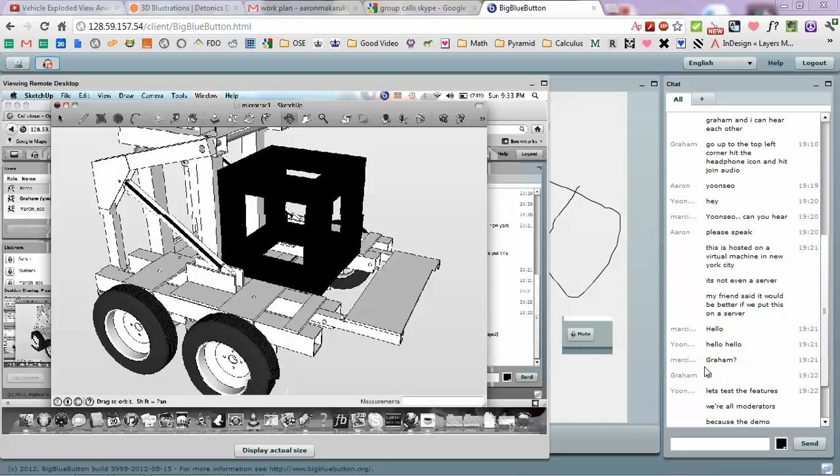As far as your screen sharing, just keep that. Hello? I'm still here, it looks like Marcin, something happened to him. I think you might be changing settings because you have to log out to do that.

Hey, open that file again, let me take a closer look. Okay. Yeah, please ask questions, because I think it looks pretty funny too, but it's like really wide in order to make room for the quick connect wheels and still keep it small.

Hey, because when you share there's latency, see how wide that is? Yeah, hold on. Try not to move it so much because it distorts it over the latency, just kind of keep a fixed view if you can.

Let me get it. Okay, I got dropped off. Did you guys get dropped off too, or no? No. Okay, I got dropped off, basically I just joined it again. I got dropped off and I went right back in.

Okay, that's looking good. What's the width of the base? What's the base width? It's about 4 feet. 4 feet? Yeah. How are you getting that to fit? As far as I know, the shortest width of the base would be like 7 feet. Well, wheel to wheel is like 7 feet if you use the existing configuration.

How'd you manage to do that? What'd you shrink up there? You cut off something, because the width should be... you're telling me 4 feet? Quick connect, you... yeah, the quick connect wheels. How'd you do that?

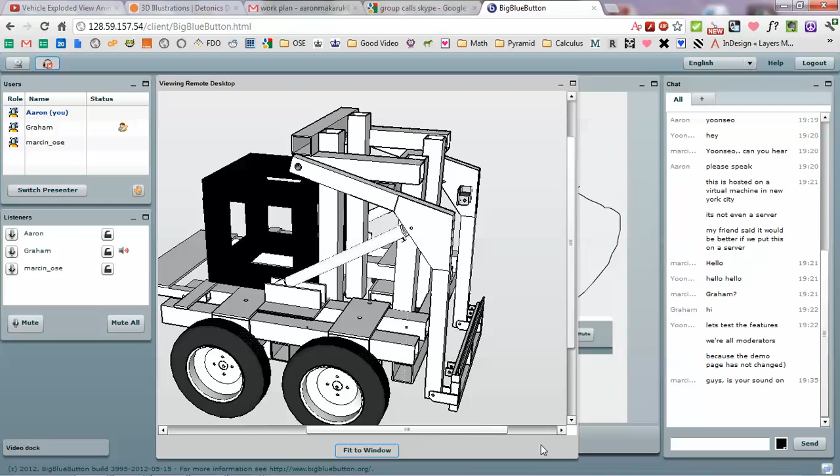Let me give you a bottom look. I don't know how these hydraulic motors are configured, I really have like no experience. Oh, okay. Oh, interesting, okay, but you're showing drive on one side only.

I meant to do it... yeah, because I don't know. Could you do like one... I didn't mean to do it like that, but like one on opposite of each other? Yeah, they gotta be like that. Yeah, it would have to be one on each opposing diagonal wheel, so like one on the back left and the top right. Yeah.

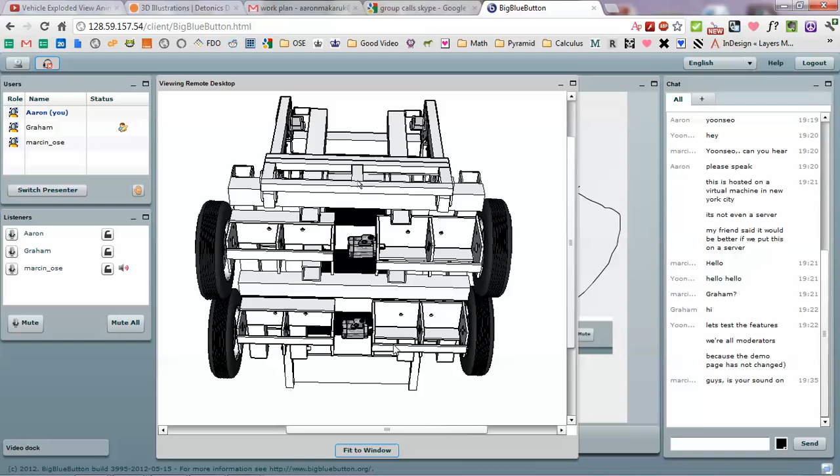Okay, that's all, that's pretty good man, I'm pretty impressed, you basically took the existing elements and reconfigured it. The issue is, yeah, you're using one motor instead of two opposed motors, which shrinks the wheelbase. That's awesome, and yeah man, that's cool.

And that person there is to size, right? Say what? He was asking if the person is to size. What? He was asking if the person is to size. Oh, I think it's like an average sized person, yeah, like 5 feet 5 or something.

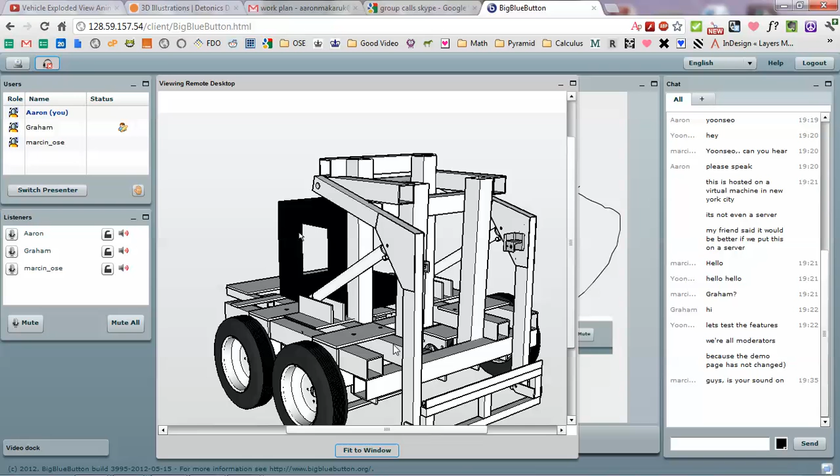Okay, so tell me about the wheels, what size wheels are you using? Like 20-some inches? I think they're 12 inches. Can you measure across? 1 foot 8 inches, so 20 inches. If that's 4 inches for the tubing, there's only 5 sections of tubing that fit in that wheel.

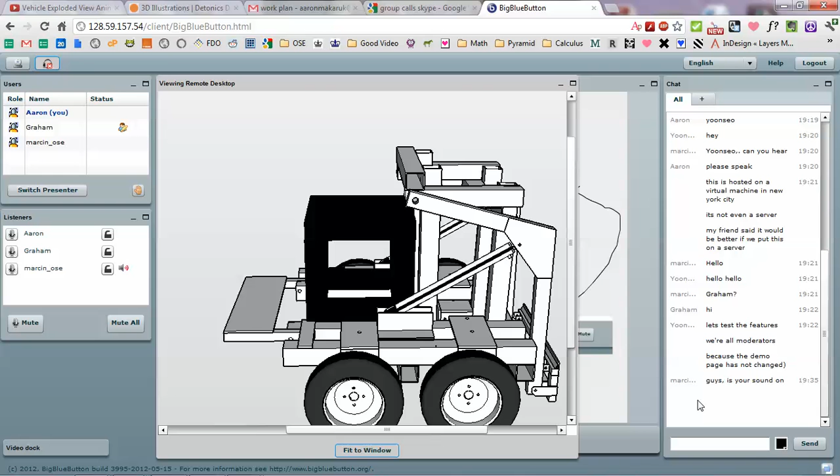It looks like it. Show me that directly from the side. Yeah. Okay, 1, 2, 3, that's about right. Yeah, 1, 2, 3, 4, that's about 20 inches. Man, this is so crazy.

So it's a 5-inch clearance from the ground, from the bottom of the frame to the ground. Okay, 6-inch clearance, okay. And the width between the middle of the treads, or the outer to outer width, wheel to wheel, is how much? Because that's the real consideration of how you can get into tight spots. What is that? 3 feet 8 inches.

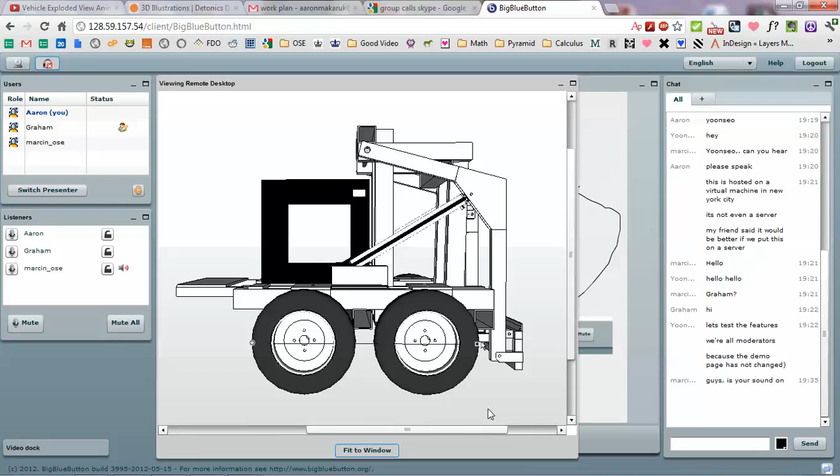3'8" from the front. This thing is tiny, but it's very wide though - it's like 5 feet, maybe 60 or 61 inches wide.

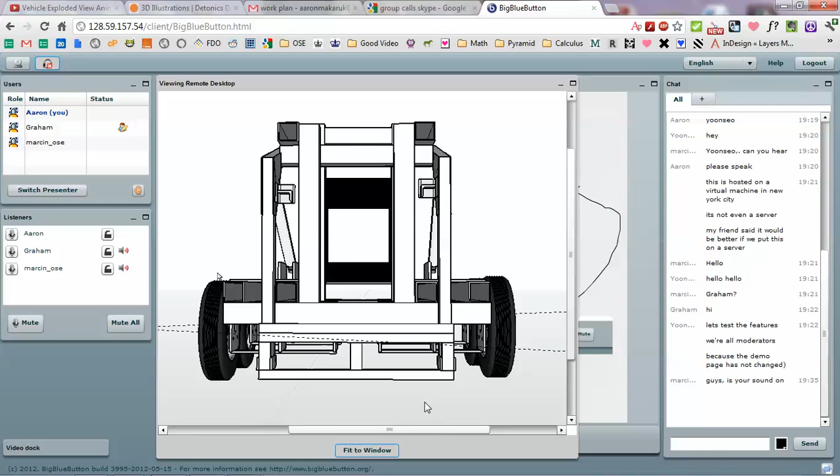I want to show Brianna, show it from the side with the person. Show this craziness to Brianna - she just sat through here. A little micro tractor, Graham. You stand on the back. Let me get a person here - I deleted it so you could see him better. This is crazy, look at it.

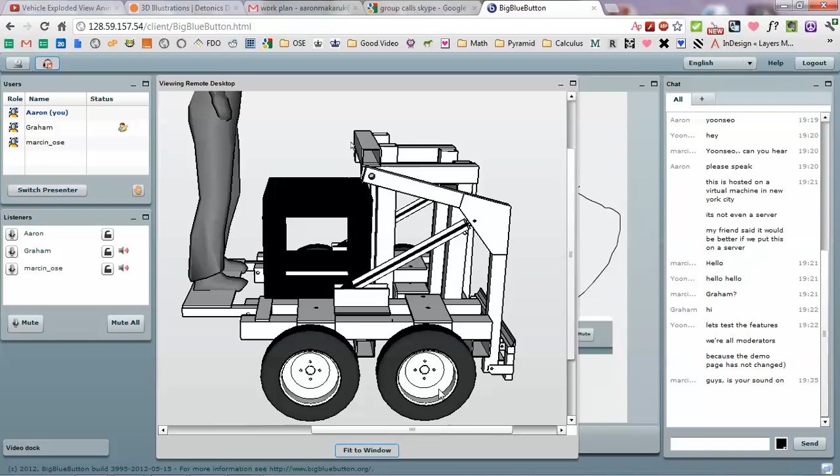No, that person is over - that's cheating, that person is like 8 feet, man, maybe 10-foot person. I think 6'7". Wait, show it from the front.

You said the width is 5 feet of the tractor? Does that make sense? That seems very wide to me. It is pretty wide - can we do anything about it? The only thing we can do is stagger the wheels so they're a little uneven, which is worse for balance, but not totally bad.

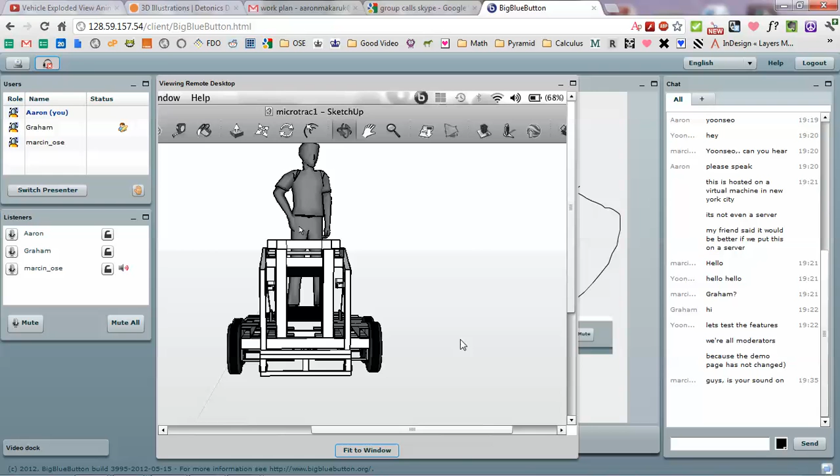You know what I'm talking about, if you look from the bottom? Look from the bottom, and you can stagger by 8 inches, or in fact you can stagger by about 3 inches.

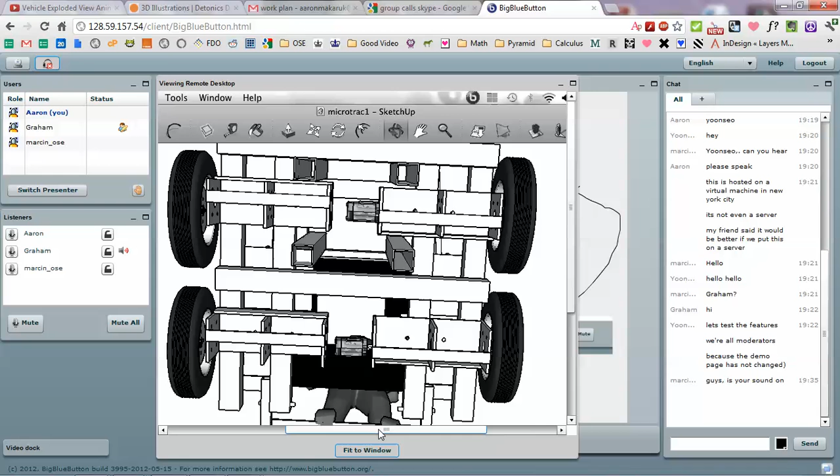Is there any way that I can take control over your screen right now, or no? I don't know about that. Try it - I mean, no, I can't take it.

What I'm going to say is you can stagger basically the wheelbase - keep that picture on top, stagger the wheelbase such that you literally have the quick attach wheels staggered. That's so wide. Not great, but it's doable, and that way - go ahead.

What if we did like some kind of tracked wheels? That's the other issue - you'd have to basically connect these two because you can't have two-wheel drive on opposite corners, that's not going to work. You need four-wheel drive, so you have to tread them anyway.

The constraint about the big set of modular wheel units we have right now is that it's so long, so you naturally make it - but you can do something like, let's see, what can you do?

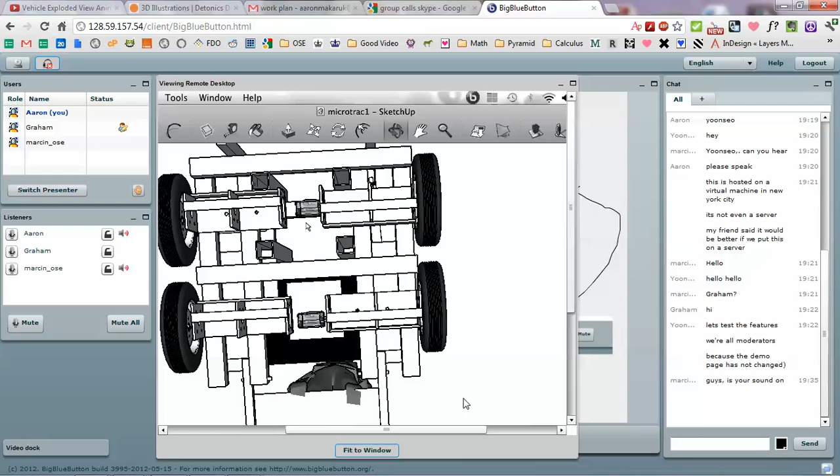Aaron, what do you think? Oh man, I don't know. I'm thinking through another problem on the side - I'll tell you more about it, but I'm definitely trying to solve a relevant problem. I don't have anything on this, but I like your work though, as far as this goes.

How long did it take you to do that? I finished it - I was just putting the back, like the riding platform on yesterday. But I don't have a lot of free time here.

Tell me again when you were going to be made available. I'll be available from Sunday and then on. From what date? Next Sunday. No way, really? No wait, I didn't mean available to come to Factor e Farm, but I'll be available to do more like work on the wiki and stuff. But I'll be available to come, probably late June, like June 25th. Okay, let's build this thing once you develop it a little more.

Yeah, I'd love to, let's do it. So this is going to be like an awesome example where you're a direct stakeholder, and we're also direct stakeholders because if you're here, you can test it out, and Gabrielle can start using it and we can actually do little tasks with that and see how it works in practice. This would be awesome - that's a total excellent case of a user case.

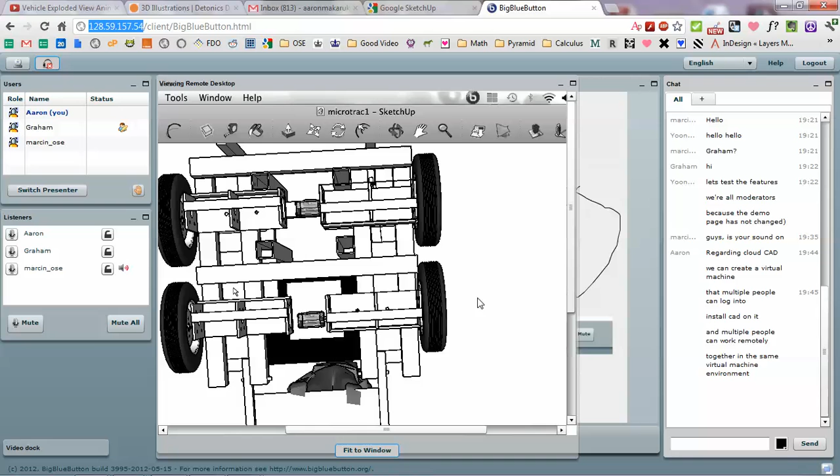Okay, so the only thing I can say regarding the strategy to make this work out, we can simply have the drive on opposite sides, and then, since we're gonna use one wheel, drift the whole part. Point to the upper left wheel, and point to the right hand box there—not that left hand box, the right hand box. Nope, to the left. Go to the upper left wheel.

So if you get the quick attach wheel assembly, you've got the 3 plates with the holes through them. Go to between the second and third, if you're counting from the left-hand side. No, call that the first one, let's say. So second and third would be towards the right of that.

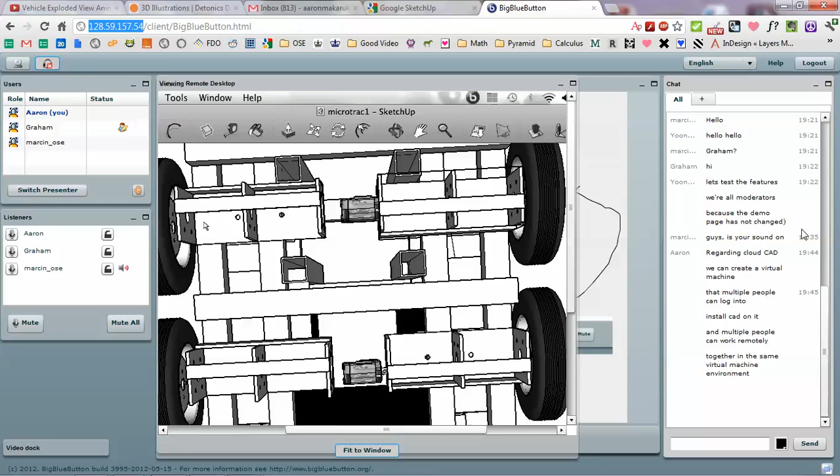What? No, go to the upper left wheel. Okay, the upper, and take left, yeah that wheel, and go take your cursor right. Like right to that first box. Okay, yeah, right there. Go to the second box there. Okay, yeah, that box. Basically, we can make it so we get rid of that vertical plate—if you call it vertical, as in we're looking from the bottom now, but it's a vertical plate.

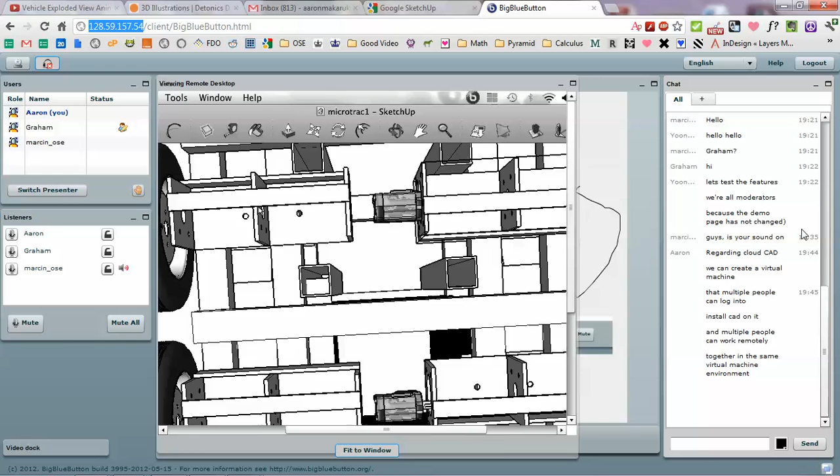We'll just get rid of that vertical plate. Or we can actually use that one. And therefore we can truncate this whole assembly to the point that you can shrink the wheels down. Let's see, because the only requirement there is if it's an idler wheel, then you can totally take that right-hand side part out. You can take out that thing because you don't have a driven wheel there, so you can get rid of the motor, the place for the motor, and you can get rid of the whole chamber there.

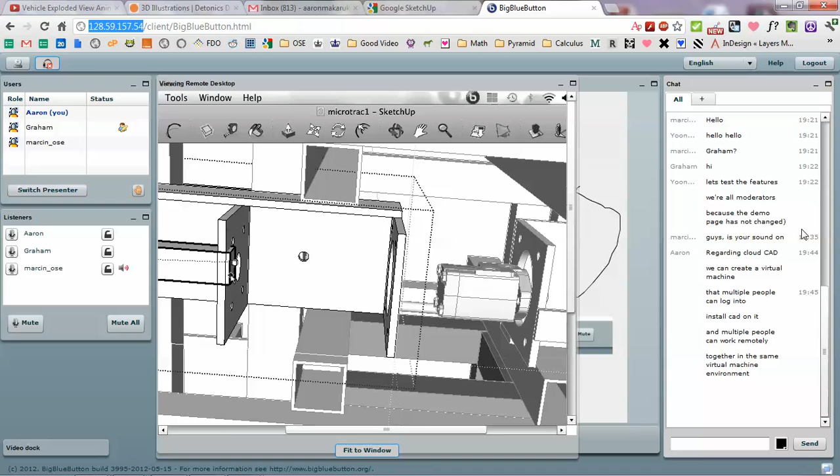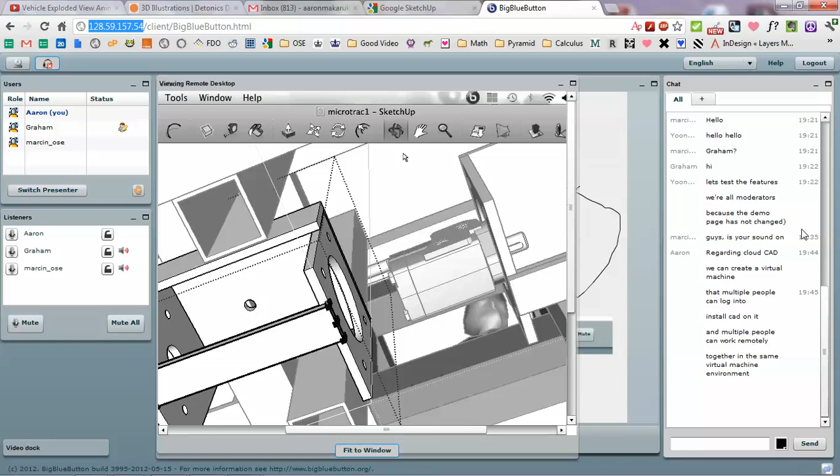So that means we would have to use a different approach over the second piece of 4x4. You would have to do that. But you would quit at the 4x4, so basically that other—you kind of know what I'm talking about, right? Just rework it so you get rid of that section while being able to grab the 2 pieces of 4x4 with the quick connect wheel assembly. Because you know how there's that—okay, hold on a second, that assembly? Yeah.

So just this one, cut it off right after here. It's catching up—yeah, you gotta, not right after, because you can't make it, you gotta pinch it down into 2 pieces of 4x4. So you gotta leave at least a little bit over, I mean you might as well leave it. Make it 12 inches long. Right now it's about 18 inches long. No, right now the top plate is about 15 or 16 or 17 inches. Make it only...

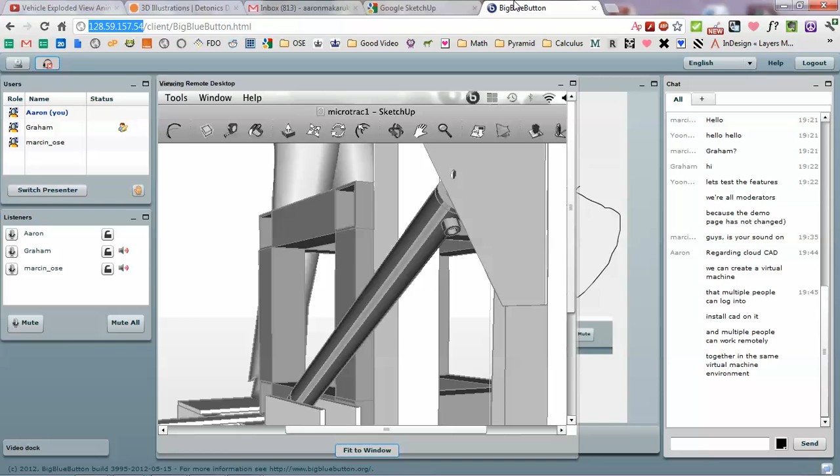So shrink it in from that edge to basically span just right there, right there. Yeah, right there, there. So that way the wheel assembly only grabs onto the frame, but it doesn't go any further because you don't need that driven part. So, I mean, that's getting away from this hypermodularity, but okay, that's one way to do it. We compromise the hypermodularity, otherwise we have to stagger the wheels, you know?

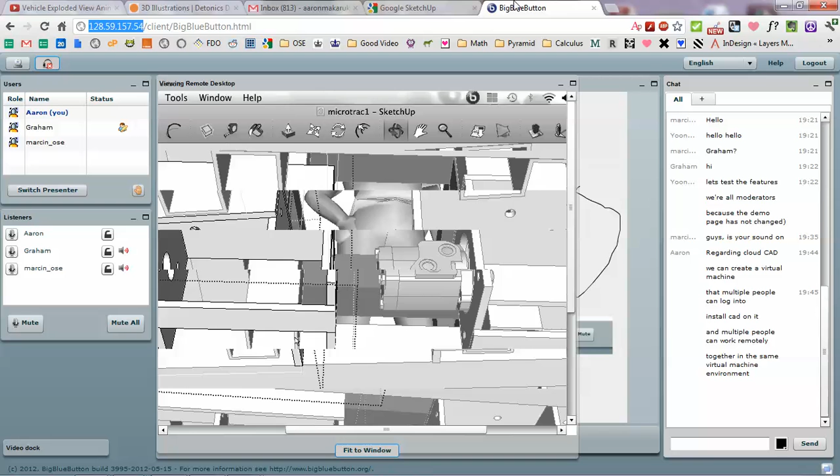Yeah, because our goal is to reduce the width. I mean, we should reduce the width to about the same as, probably, a little bit bigger than the length is actually good. Because it allows you to turn very easily. You'd literally be able to turn this thing in place.

Yep, that's good. And we'll have to make little track chains, micro track chains. And we don't have to stick to rubber wheels—we can put on metal wheels if we can't find proper rubber wheels. Now rubber wheels, they wear out. If we make metal wheels, this thing is lasting 100 years, so that's actually pretty cool.

I'd be kind of interested in doing metal wheels, but then there's the issue of how do you put the metal tracks on it. I was thinking maybe you can just cut rubber from an old wheel and stick it onto the tracks so you don't have metal against metal. Or we can just use regular wheels, like 20 inch donuts—car donuts—which are $5 or free from a junkyard.

Cool. Wow, this is good, man. I'm pumped. Yeah, me too. This is awesome. Hey, look at that. Look at that, though—see that big hole through that plate?

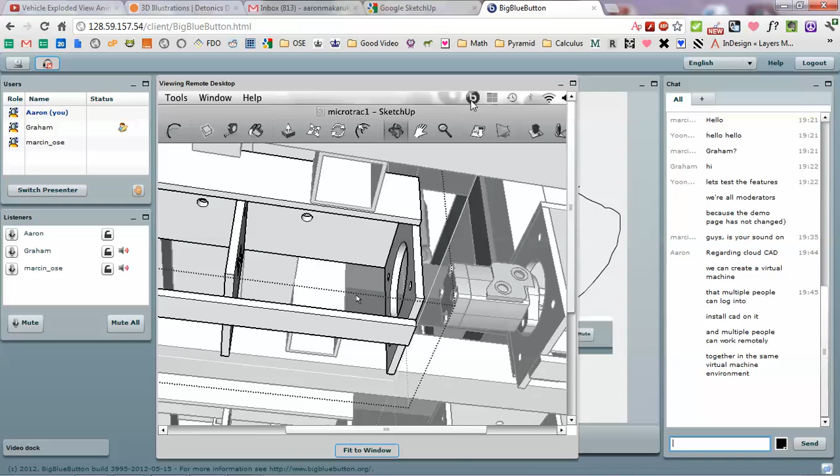What if we actually did it so the motor goes through it? I don't know, that would be nice, but I don't think it goes right into that hole. There's fittings that go away from that motor, so that's probably not going to happen. Maybe you could just make a little stand right here for it, or somewhere.

No, you can definitely fit the motor in that space, take out that plate, and build a cage around it for support.

That's the only thing I was wondering about, because you want this to be as small as possible, because where I'm using it, I can't have it be 60 inches wide.

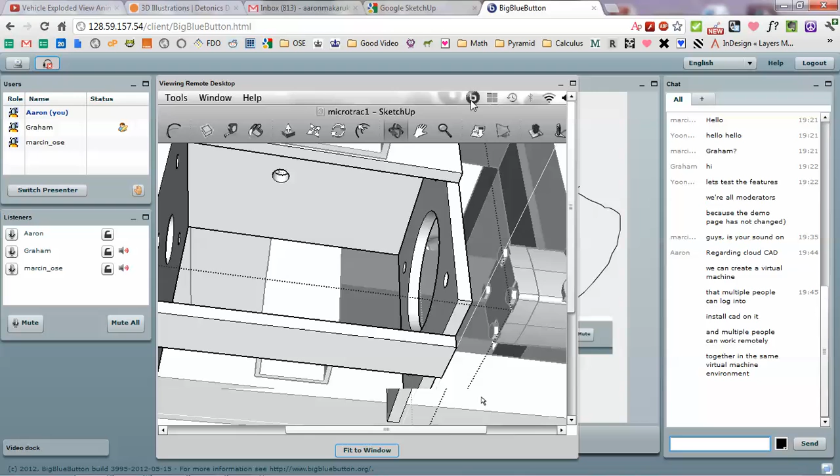Now, what do we need? I would like your one-wheel design. That would be ideal, but let's try to shrink this. One-wheel design has really hard balance issues, though. That's the only trouble with that.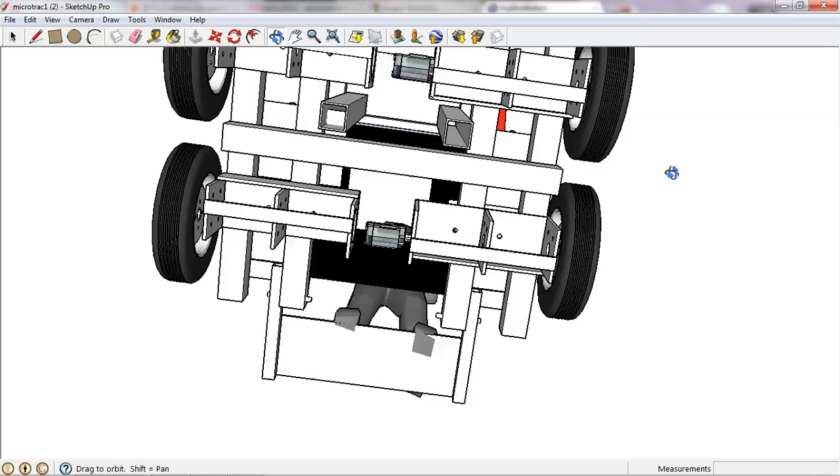You can do two wheels, front and back, and it will have excellent stability. What I like about this is that it's pretty much self-contained, because I know what it means to do one-wheel balance. The balance issues are hard, and with two wheels you still have tipping back and forth. So if the loader is lifted, when you take off an implement, it will always tip. I like this part, that you have a lot more stability to begin with, and you'll have an easy time taking implements on and off.

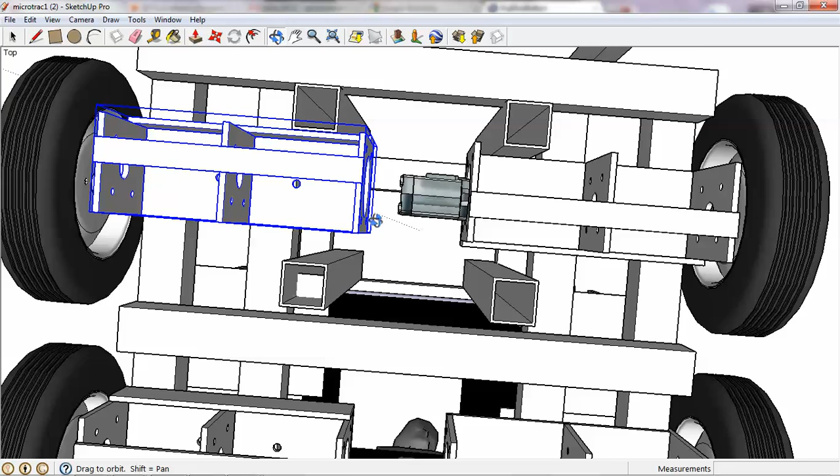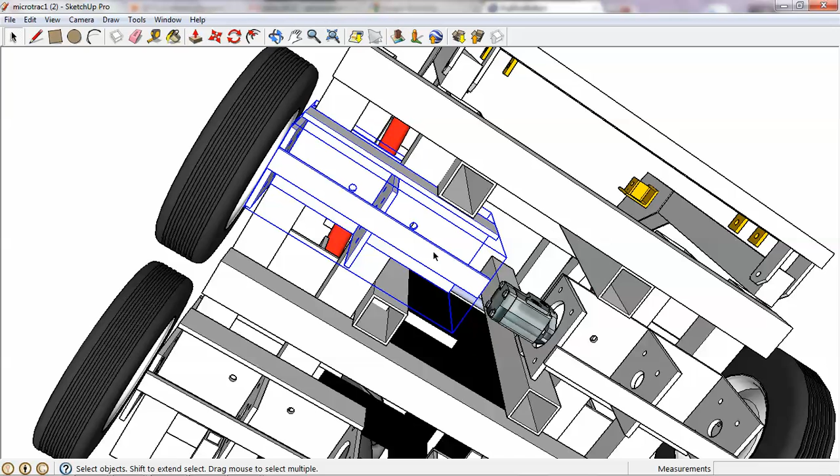How come you're thinking about disabled people for this? Well, I'm gonna be working with my dad, and he's approaching 70. This is just an example, like, I won't be able to use it. I don't want it to have to be something where you're gonna have to lug a power cube around.

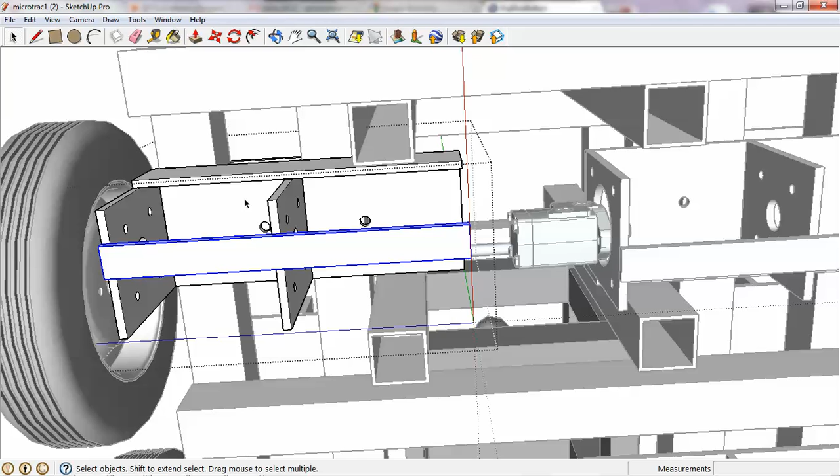That might be the only thing that needs to be taken on and off, which isn't a problem. I definitely want it to be as easy to use as possible.

Sorry, once again, I got bumped off. Hey, sorry, I got bumped off for the last 30, 45 seconds.

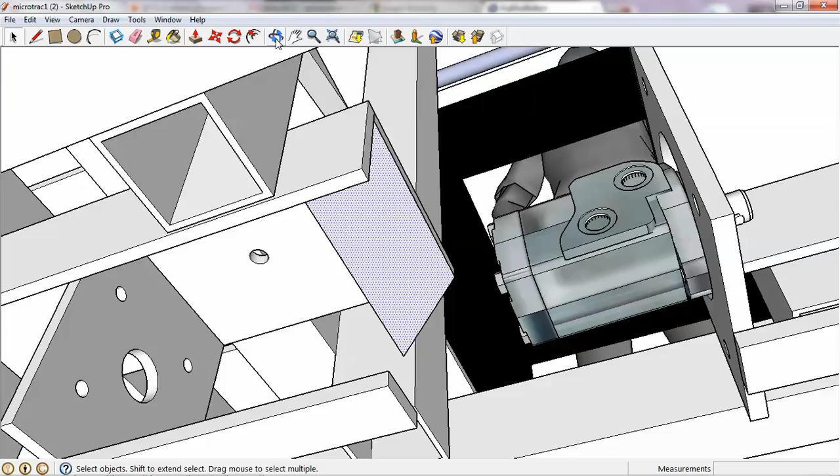Can you say that again regarding your dad approaching 70? I was just saying, well, he's probably going to be working with me. This isn't for sure, but I'm counting on it. We're thinking he's about to retire and he wants to get a part-time job doing farming. So this would be a good example of designing for people that aren't strong, or that can't lift a lot.

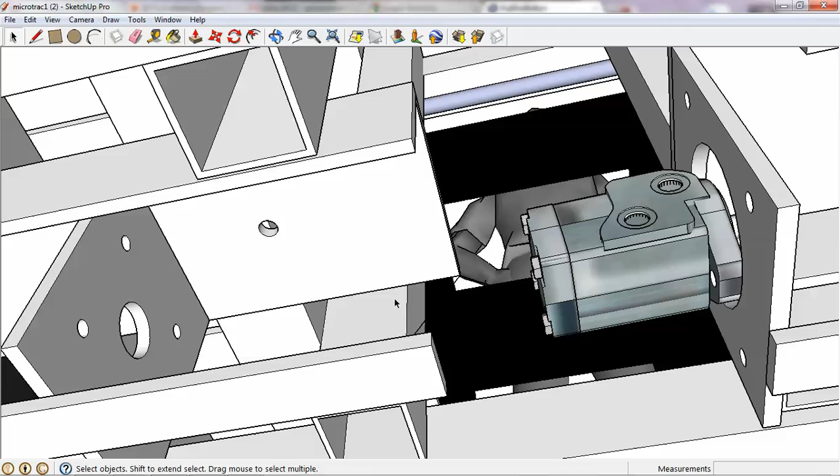That's an excellent idea, that's actually awesome. So you'd have them stand on the platform? Yeah, or you can fold this platform up and walk behind it. That's what I'm showing you. I took this idea from Toro Dingo. Have you seen that?

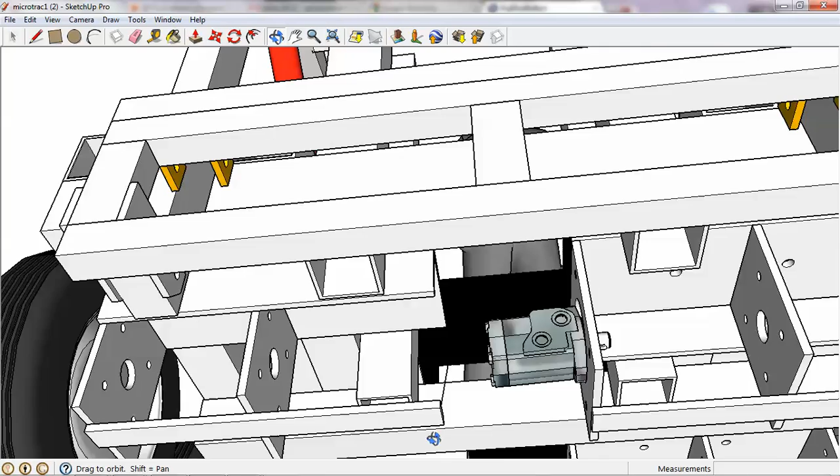Let's see. They actually have models that are smaller than this. Whoa, holy cow. What is it? The Toro Dingo. Can you send me the link?

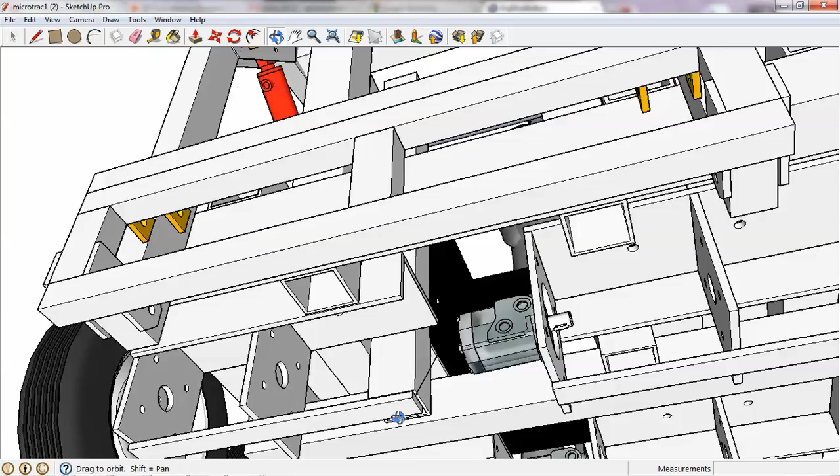Nice, very nice actually. Good, that's a proper study of industry standards. Have you read through the different steps of our development? Somewhat familiar. Well, what you just did is part of a study of industry standards - what does the competition do? And this Toro Dingo is an example of industry standards that already exist out there.

So basically, go ahead. Working on this farm he uses a BCS tiller, a two-wheeled model with a power takeoff, and he says the biggest thing is maneuverability and ease of use. So is it good at maneuverability? No, it's hard. It's like the hardest thing we do here.

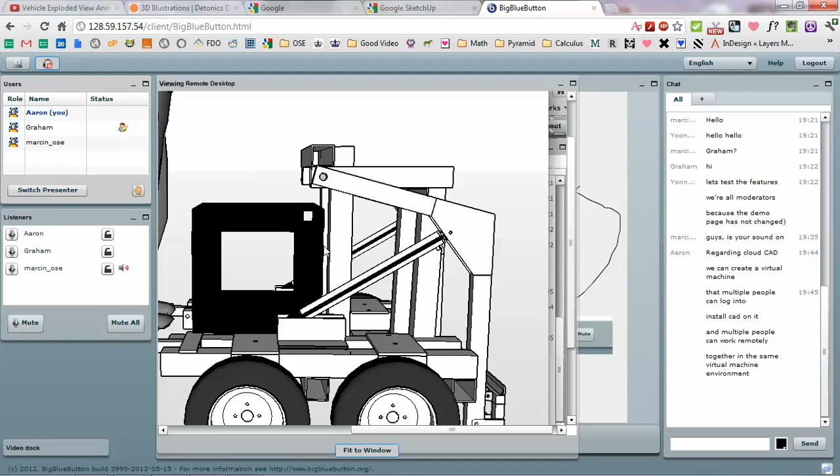Well, that's exactly right, that's why I'm telling you the four-wheel is a really cool idea, because that thing you can spin in place - we can spin our tractor in place, basically, the big tractor. So when you can turn in place, that's really useful. You don't have these huge turn radii. And that was the problem with the MicroTrac 1.

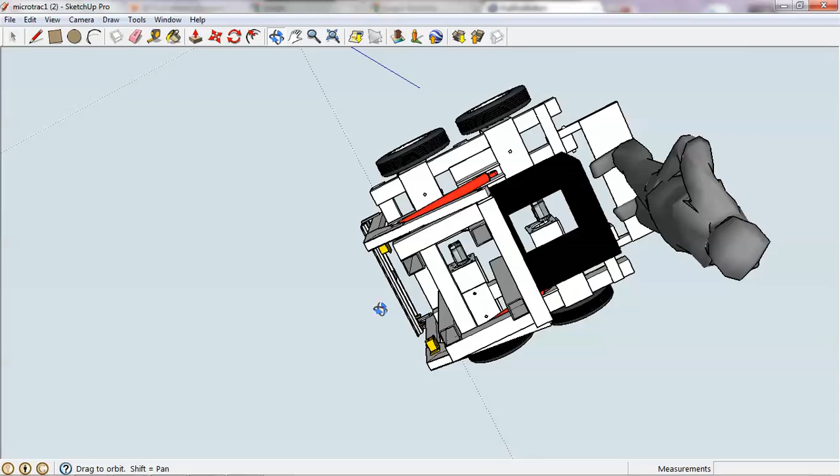You had a huge turn radius. I kind of cheated in that video I did, walking behind it and making these turns. It looked like it was all maneuverable, but those were pretty wide. You'd basically trample over things. You can't turn if you're in a row, there's no way you can make an angle.

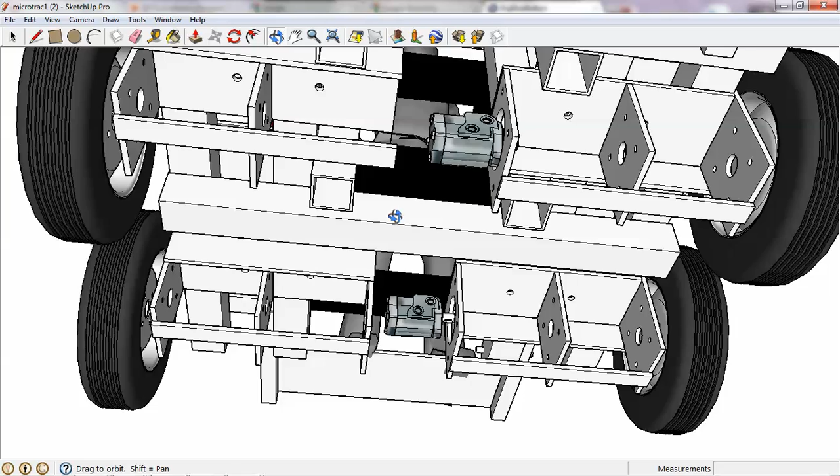So it'd be critical to have this nice little base, like if you could get it to a 4x4 or 3x3 wheelbase. Is 3 foot acceptable to you? Yeah, let's go for 3x3. 4x4 would be getting into the scale of larger operations.

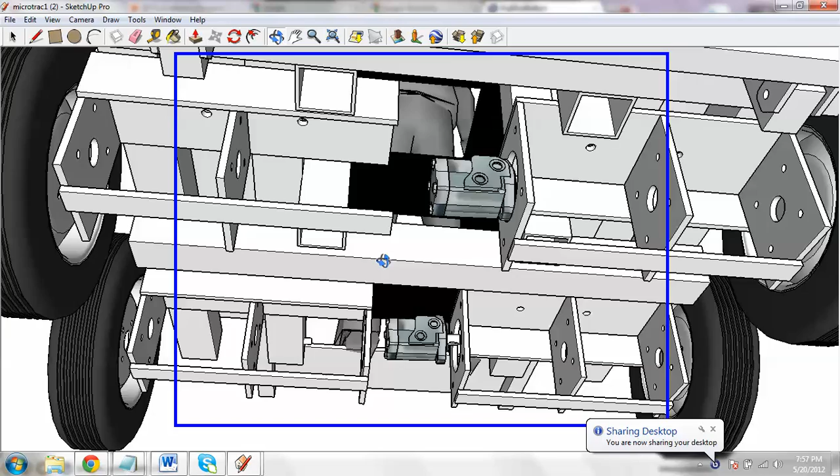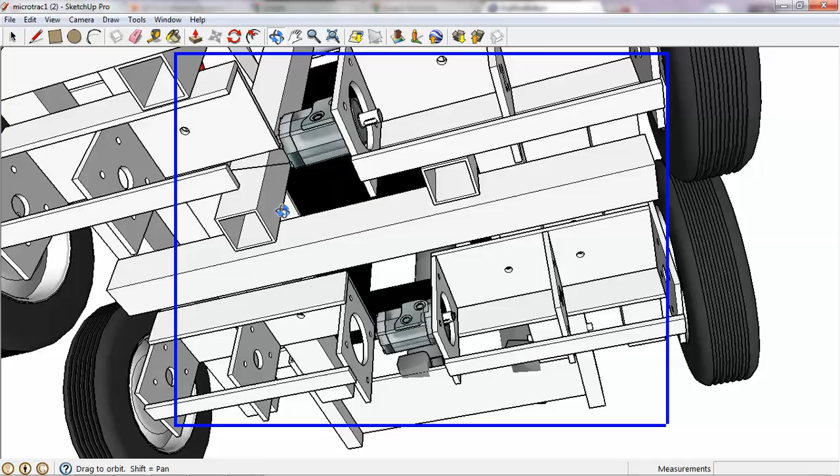And in that case, you have no problem getting a little tractor like this in there. Even the big one can easily fit in that too. But that's what we were thinking about doing in practice here.

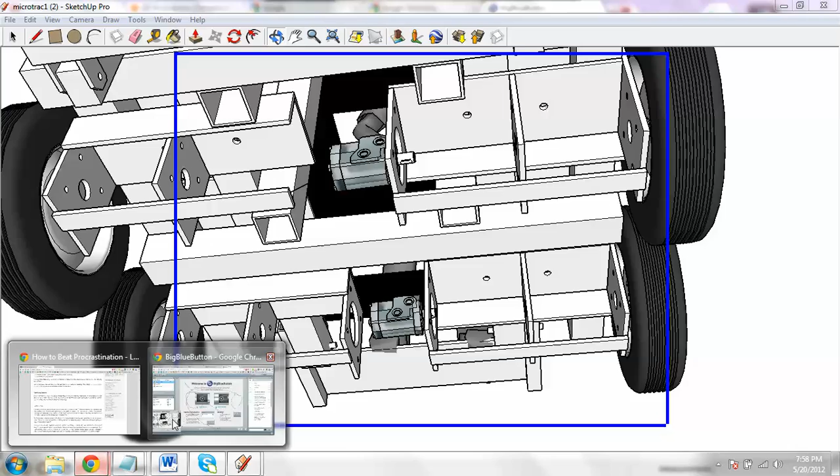Anyway, that's really cool, I'm really excited about this. Wow, this is awesome. So let's talk about, you can work on this more. Where are you at right now? I'm in Jasper, Indiana.

Okay, so we have very clear objectives for what you can do here. You've got the CAD going, let's collaborate on that so we can come up with full fabrication drawings. Would you be able to do it off SketchUp, or should we try to get 2D fab drawings with nuts and bolts and everything? I don't know how to do that.

Basically it's something you can do in a professional CAD package. You can't really do that well in SketchUp. So we can probably get somebody to help get the full fabrication drawings, an exploded part diagram, and nice little simulations. But that's a great start on the SketchUp.

Can you do an animation of it, like showing it going with the loader going up and down, or you don't know how to do that? I don't know how, but I'm definitely interested in learning, and interested in learning the fabrication drawings. Do you have access to any professional CAD package? You really have to learn that. We're trying to figure that out.

Is Blender one? Blender is not a CAD package, it's a modeling package, but that could get you the animations and the exploded part diagrams. That's doable, but we really need this full-blown 3D CAD package.

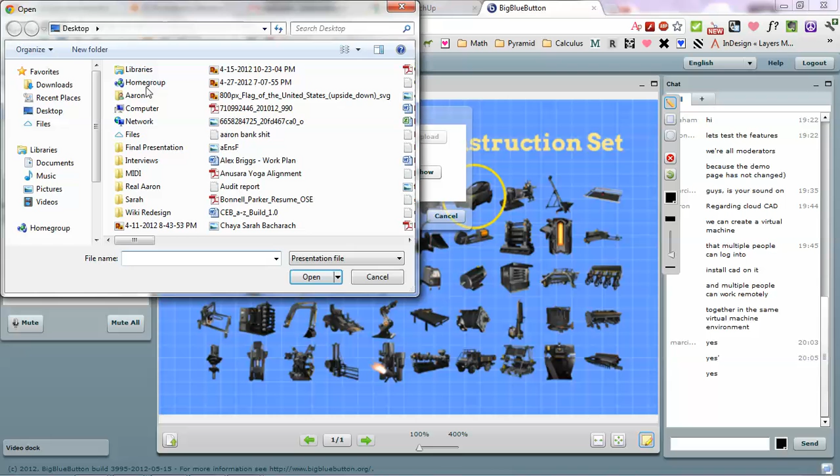So the bent loader arms, the purpose of that is for height? Yeah, the purpose was achieving the height while keeping the loader arms very close to the body, because if you have straight loader arms, you basically have the tractor tipping forward. Yeah, I see that - like say you have a full load bucket, you can possibly even tip it with a full loader bucket.

Cool, yep, I'll definitely take that into consideration. I'm getting a lot of ideas now. Okay, that's good, that's good.

So do we want to say then, shoot for the 15th? Yeah, I can definitely be there on the 15th. Okay, that's awesome. And so for how long - how long are you considering staying?

Well, on the wiki I was reading, it said one month minimum, and then three months for something like an apprenticeship. I mean, I can stay for at least a month and probably up to three to four months.

Okay, so how do we play that? Maybe, would you like to stay for three or four months? I can't say right now, but I think I'd like to. Okay, so let's call it the first month a trial to see how you like it, and hopefully you like it and then you can continue. We want to make sure you can finish this within that time, but if you want to use it and get real experience and make modifications, that's more than a month.

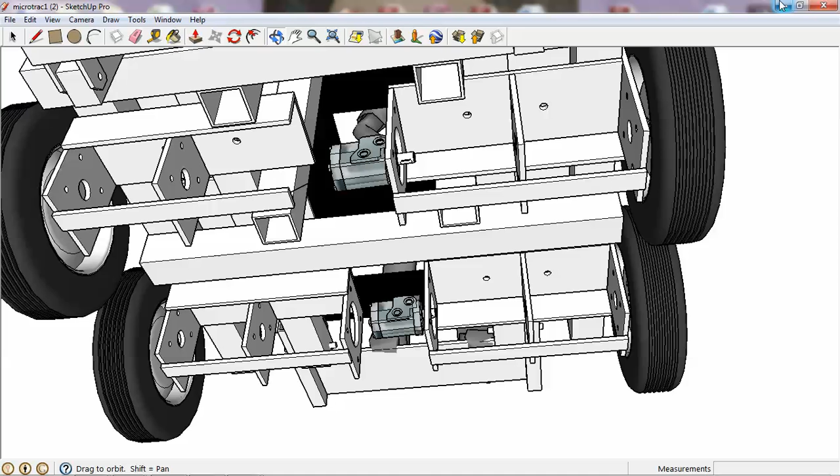What are your concerns? Do you have any concerns at this point? Not off the top of my head, but I'll let you know. Okay. Excellent. So the next thing would be to write a contract to get you here, plan on 15, one month, and then hopefully three or four.

What's your absolute final date that you've got to get back by? Final date? November. November, that's okay. What's that? It's over like four months. Yeah, definitely by November, because I want to get this market garden operation going.

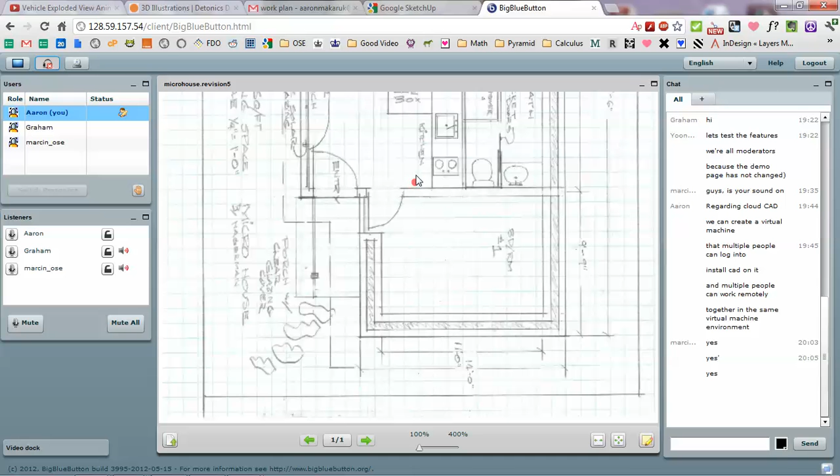Can you actually start preparing for next year, or would you plant stuff out at that time? Well, I'm going to be building some stone terraces during the winter, and then by spring I'll be planting probably mostly just cover crops, and maybe next fall I'll be planting my first market crop.

And how much area are you going to be growing there? It's a really small space, but I think it's just big enough to be able to make a living wage. It's probably about a quarter acre in all growing space, little patches that add up to a quarter acre. Is that at your parents' house?

Yes, and my dad's retiring this summer. He works for Raytheon, the bomb company. What do you do there? He works in the shipping department, and he's worked there for 10 years. I think he's just tired and ready to be done, so I think he'd really like to help me do farming. He's already getting into permaculture and stuff, like rainwater harvesting and chickens.

Yeah, awesome, that's really neat. So when you come here, you want to definitely focus—it's probably, if you're developing this tractor, going to be your main focus, and so we can train you. How deep a level of training would you need? We're considering either a 10-hour course, which I think you should probably take, or a deeper level of up to 30 or 40 hours of training. What would you be interested in?

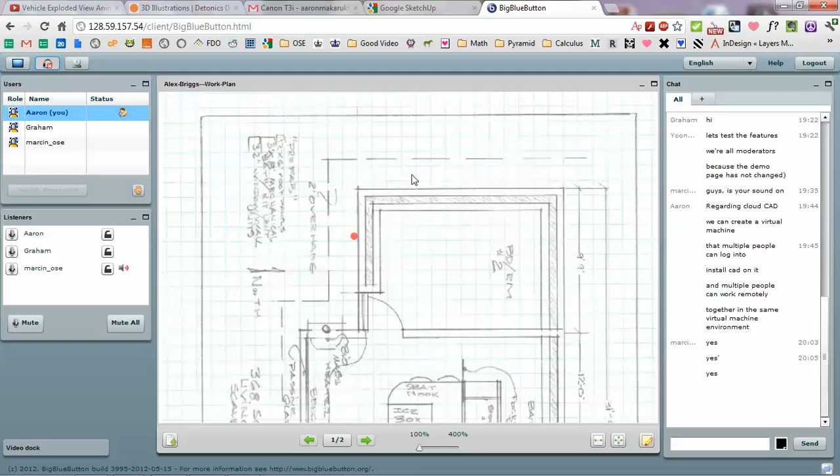Okay, yep. And then let's see, we do have some framing on the new house here. Can you help out a little bit on that? You said you did carpentry. Yeah, that's something I put into my plan, I sent that to Aaron. Yep, because at that time we might be finishing up. There's 4 remaining rooms in the hab lab that we're going to need to finish. So maybe we can help out, do a couple hours, or maybe a work weekend.

Can you hear me? Yeah. Yep, at that time there's like 8 people here or so, 8 or 10 people, a 6-hour work day where we get 8 or 10 people working on finishing the house. A couple of weekends would probably enable us to finish. 2 or 3 weekends would probably enable us to finish all that space. Cool, you cut out a little there, but I think I got the gist of it.

So we'll get you primarily on MicroTrac mastery and learning fab. And possibly, how good are you at carpentry? Can you lead a team to frame up a couple of walls? Probably not, I was mostly just taking orders from a master framer carpenter, but I definitely have basic principles down. I guess I'll just have to see what it is you're trying to do when I get there. Is it stud frames? Yeah. I'm probably a little too rusty to be able to lead a group.